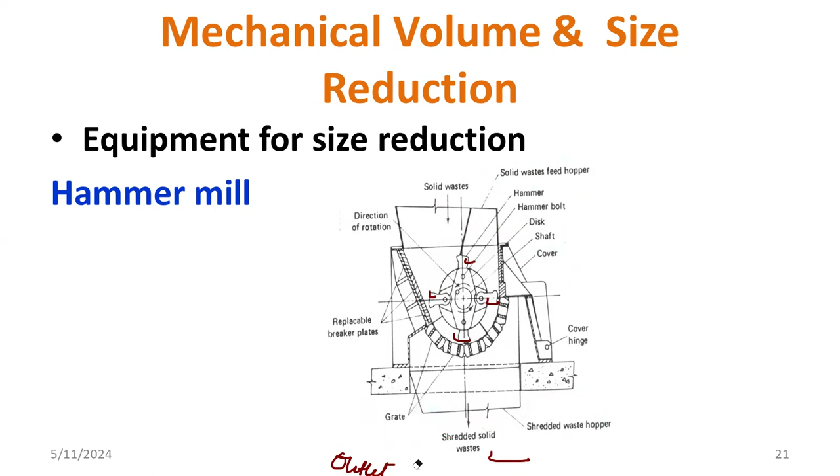So this is regarding the hammer mill. It is the most important device used for reducing the size of solid waste. The detailed explanation is shown in the next slide; you can refer to the working of the hammer mill. Whatever I explained is written there in the form of sentences that can be used from an exam point of view. Next is the hydropulper.

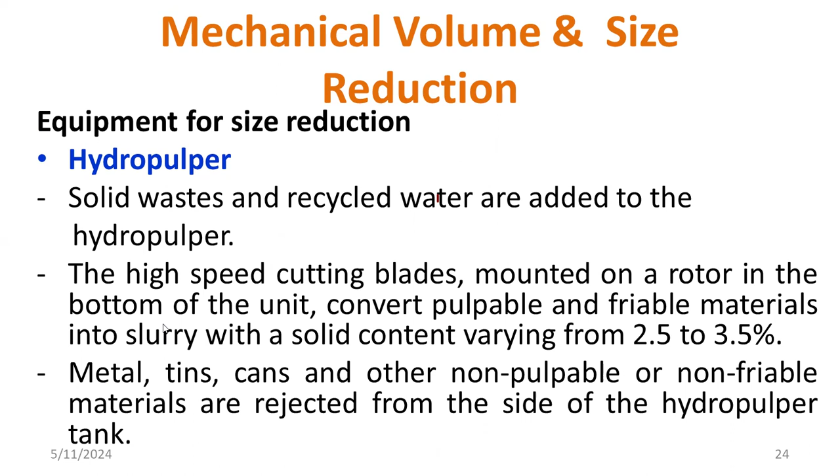There is a centrifugal force that is generated, just like a washing machine. Now, the brief explanation is given here for your better understanding - especially metal tin cans can be easily separated using a hydropulper.

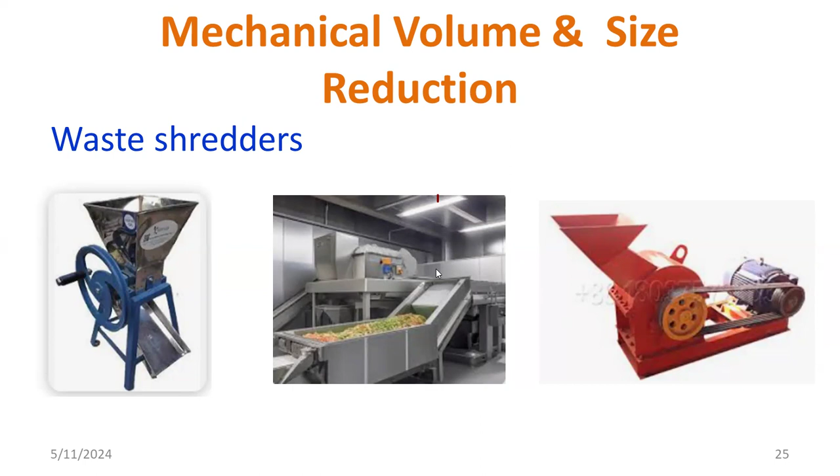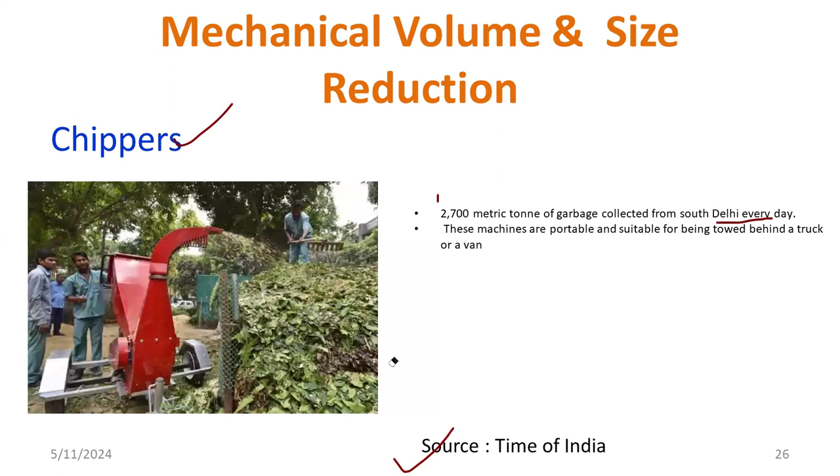There are also chippers, or waste chippers - this is one of the projects I collected from a source named the Times of India. This is another project where tree leaves can be reduced, especially used for a street where there are so many leaves covering that particular road. It is very easy - we can reduce human effort and make it very convenient, and the leaves can be easily disposed of. We easily move on to the disposal area. This is applicable in Delhi - every day they do this, especially for large streets, which can be cleaned in a fraction of seconds or minutes. That's the plus point of these chippers.

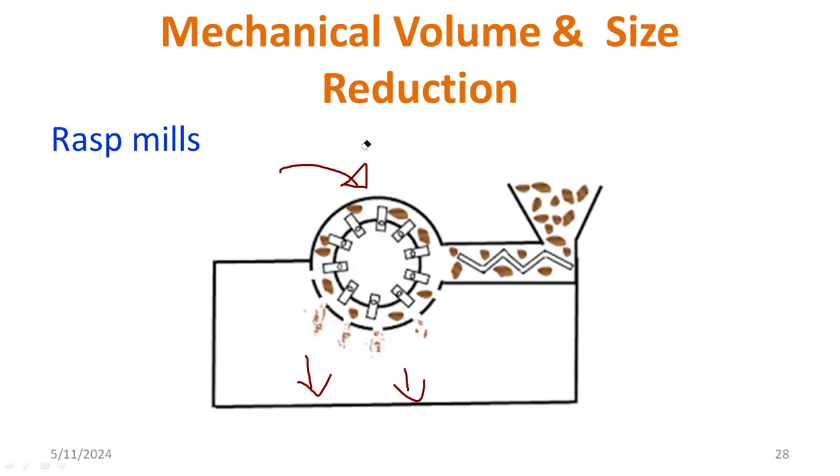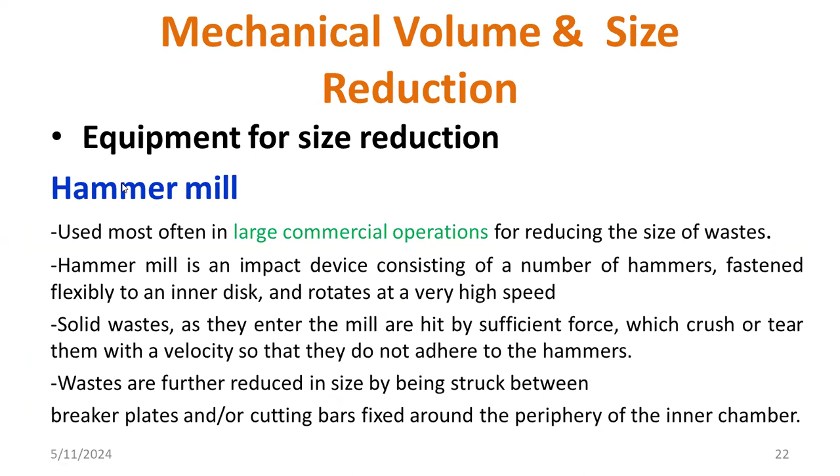In this session, I discussed the most important devices which will be helpful for the size reduction of solid waste, especially hammer mill, hydropulper, jaw crusher, etc. These are the most popular, commonly used devices for size reduction of solid waste. In the next session, I'll cover chemical size reduction.